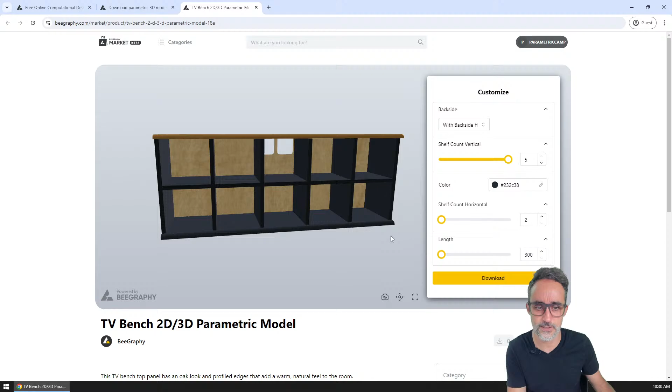As I said, I think Beegraphy has two main modes: editor and market. Market is basically a way of placing models that people have built parametrically in Beegraphy and making them accessible via a simple UI. For example, let's say you have this 3D, 2D bench parametric model. You can allow people to use it and change the model by just giving them the model and the parameters - for example, the amount of vertical partitionings, the amount of horizontal shelves, how long or short it's going to be, the height, the width, do I want 2D or 3D view? Oh wait, it actually breaks down into the fabrication panels. That's pretty neat, this model is pretty nice.

So I cannot stress how awesome this is. I believe ShapeDiver had a similar version where you could upload a grasshopper definition and they would give you a UI wrapping that grasshopper definition, and you would define which sliders and parameters are surfaced. But here with Beegraphy, it looks like it's native. So there's probably a way to just take your model and publish it as something that shows up in the market, which is very, very cool.

This obviously opens the door for people to now create parametric models, and now you have the 2D layout, you have all the parts here, and it looks like I can download this file - export option, for example DXF. Let's say I wanted to laser cut this, so I'm going to download it, it'll show up here, and then open Rhino. What am I doing, oh wrong Rhino. Okay, Rhino - I hadn't opened it in so long I was trying to open Rhino 6. Where did I download that? It's in downloads, this. So I'm going to open the file. Yes, and yes, and yes. And boom! I just downloaded the layout for those shelves with the cutouts.

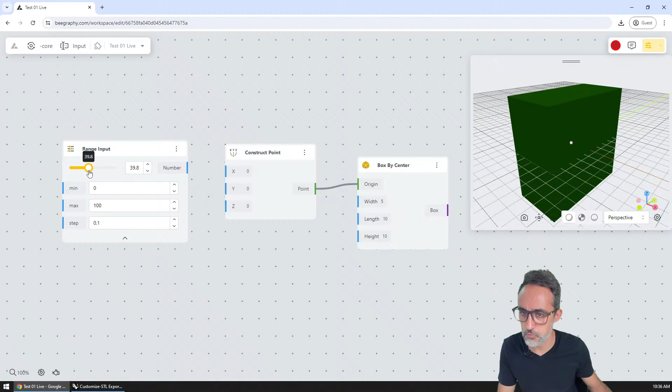And can I copy paste this? Yes, beautiful. So then that and that. I'm gonna say 5, I'm gonna say 5 here. I'm gonna say 0 - let me do 0 actually. Okay.

Beautiful. And then what about - I think this is a little too much. So I'm going to say, what about, yes. So now I'm going to width, oops, yeah, 0 width. Was that an error? Oh, interesting. The value should be - oh, this is very nice, this way of error messaging. That's actually pretty nice. Okay.

So here, the length, and then the height, and I still get the length should be greater, yes. Okay, so here, and then the height should be greater. Beautiful. Okay, we have a parametric box.

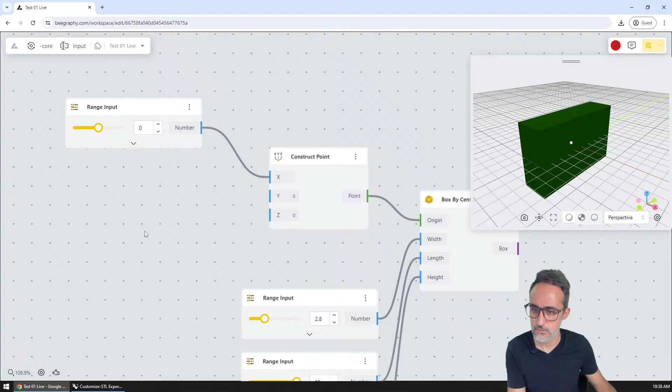Nice. And I can move it to center. I can move it. Let me redo this. So this is going to be from -10 to +10. All right, this feels very intuitive actually. And I copy and paste, and I copy and paste. Okay, and now I move it back and forth, back and forth. Okay, alrighty. Okay, we have a parametric box, folks. Woohoo!

All right, I'm liking it. So, and look at this - if I click on the box here, it centers here. Oh my God, that is genius. Where are you, Learning? I don't know who did that. 100 points for that. I cannot tell you the amount of times I was in Grasshopper and I was like, oh my God, where is that thing that I'm seeing on the screen? Where is that on the definition?

Can I do that with the point? The point is probably inside the box, so I can't really touch it, right? Yeah. That's genius.

Huge thumbs up for that. Yeah, the more, yes, very good.

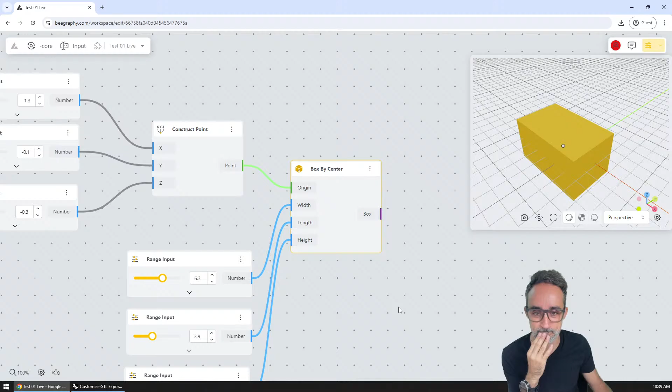Okay, now can I turn off the visualization? Yes, hide shorted list, delete, no. Okay, and this is grayed out, which makes sense. Oh, wait, what is this? Left align, right align, vertical evenly. Ooh, nice, create a group.

Oh, okay, so coordinates of the box center. Nice, this is making my OCD very happy.

Add to group, remove from group, create component. Create component, what is create component? Oh, so it crunches, I see. Can I undo that? Ooh, I cannot undo that. How can I undo that? I guess, can I undo this component? Disable. No.

Okay, so let me get rid of this and start with another range input, and this was -10, 10. Okay, so then let me delete that, and then here and here. Okay, and let me redo this, and I'm going to space evenly, create component. No, I'm going to group, and this is going to be coordinates of center. Okay, beautiful.

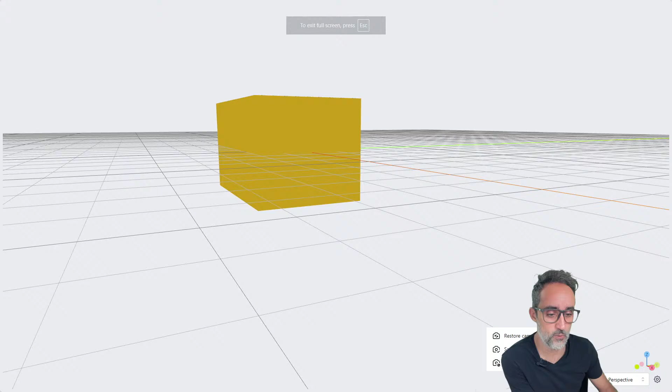I like that. Then some lighting options, which is probably not going to look great since we only have one object, right? Probably perspective, top, front, perspective, restore camera position, yes. Grid, axis, wireframe, transparent, quality, low. Okay, this is very neat.

Is it possible to add points manually in the viewport itself? Ooh, good question. Let me... it doesn't look like it. No, direct modeling is not possible at the moment. Okay, so it has to be purely parametric, folks. But that could be interesting, like a node that basically represents an object that you can directly manipulate. No, that could be an option.

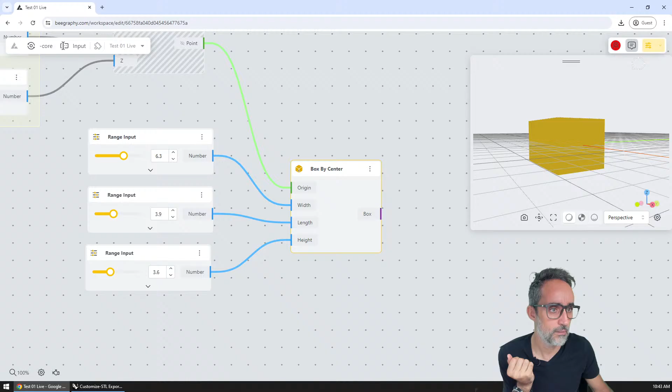Okay, so what else do we have here? This is me, this is some kind of what? Oh, so what is this? What did I do there? A comment, oh. Oh, a comment here. Oh, hey. Oh, where did that go? Oh. Okay, did I miss the comment? Did I kill it? I don't know what I did here. So a comment, where do comments go?

Okay, let me turn off the comment. Oh no, I don't want it. Okay, and then configurator, what is this? Oh, so this is a preview of what this would look like in the marketplace. Ah, interesting. I should definitely put a little more work on the names of the objects. Definitely.

Okay, nice. Oh wait, and you can, oh this is very neat. So you can, if the order in which they're given is weird, you can just turn on and off. This is the input, this is the output. If I had an output, apply sort. Oh okay, this is very neat.

Some UI color options. Okay, back. Oh, sorry, my microphone. Yes. And how do I get out of here? Oh, that's a different thing.

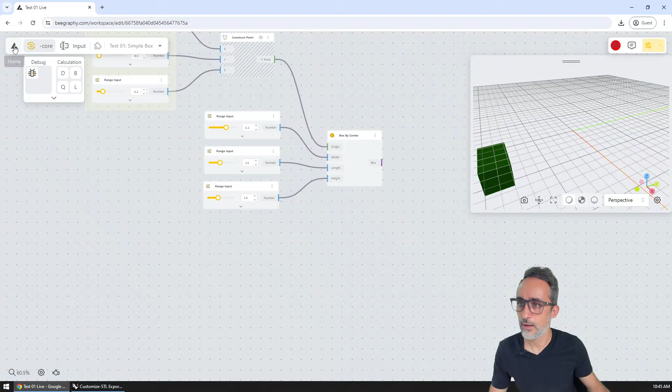Okay, plugins, unpinned. Math. List, material to exporter. Okay, oops, all right. Curve editor, no, you can draw curves manually also.

Okay, all right, beautiful, so new model. So what are we going to do? Test 2, pearl necklace. So remember, we have an example somewhere where we draw a curve and then we subdivide it and we place spheres. So let's try something like that.

Okay, so for example, there was a curve editor, twin curve, NURBS curve. And 0.1, oh what is this? Boolean, degree 2. The points count should be greater than 1. Got 1 point.

All right, so what are the curve editor? Oh, this is what Adita is talking about right now. So let me remove this. Curve editor. Oh, this is very neat.

And so I get it there. Width and height, degree 3. Oh nice, and the curve comes out of here. And these are the coordinates of the points. So I can put that on 0, 0. What is this? To sharp point.

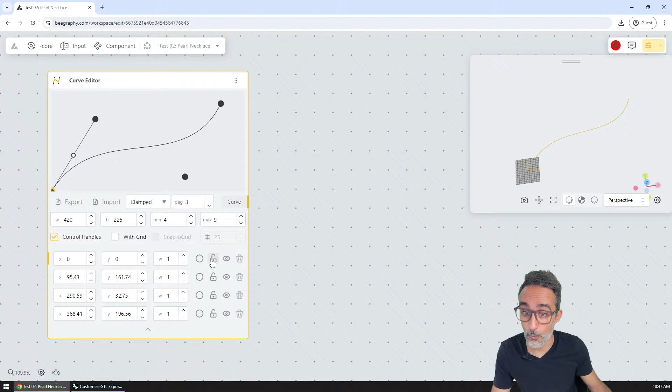Ooh, wow, this is pretty neat. And this point is now locked. And I see it, and I don't see it in the editor. I can remove, how do I add another point? I guess I cannot because it is a degree 3 curve. Is that true? No. Minimum four, maximum.

Can I add more points? And can I have the curve in 3D? Let me try opening the right curve editor. You can open it by double clicking the curve editor. Ah, there you go, beautiful. So this will be here and here.

Maybe a little plus sign here could help from a UI standpoint. Is this the right curve editor? Is that what you're saying? Curve editor, yes, it's the same one.

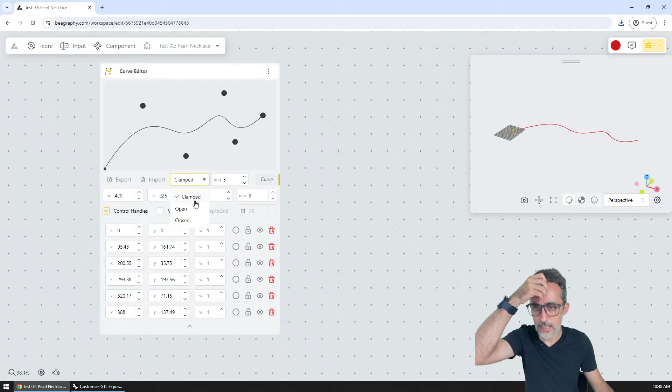Okay, what about Z? Is it always planar? Export, how do I export? Curve control points, ooh nice, and I get all the points, with their coordinates, interesting, I like that. Clamped, open, close, this is very sweet.

All right, so we have this curve, let's say, for example, and let's close it. Yes, so that's going to be the, okay, beautiful. So now let's, with the grid, control handles. You can also add points from inputs.

From inputs? Where? Arthur, are you from the team? Are you from the Beegraphy team? I don't know where to add from inputs. I guess we can import them. But yeah.

Okay, well it would be nice if we had the properties here as well. Okay, so then subdivide. Can we divide by count? Beautiful, okay, divide by count.

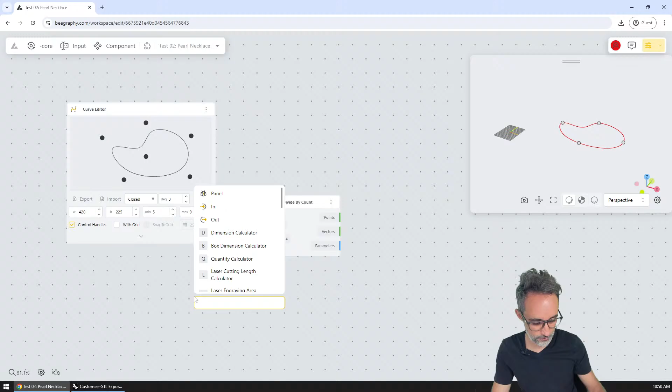And this, I'm going to range input. And I guess the range input, we can customize it to have a step of integer like this. And then this can be, for example, 50. And we connect here, up, up.

Yeah, I guess you cannot divide by 0, but the error message is not very helpful here. Oh, look at this. Oh, and I click on the points and it goes, look, I want to do this again. Oh, where are these points coming from? Let me check. Boom, it's this component. And boom, it's this component. Oh, MVP.

Okay, and then, so now we have points. Is there a panel? Can I, panel, points, length. Oh nice, oh with a little bug. That's sweet. And what is this? Debug? Oh no, and disable. Okay, enable.

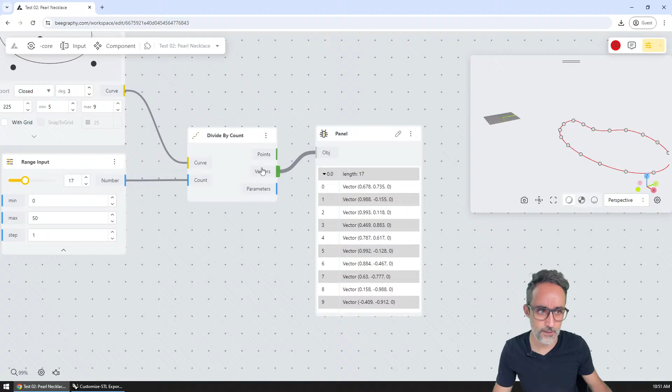So these are the coordinates, so the vectors with their coordinates. What are these vectors? Are they normals? Are they... and then the parameters is going to be the t along the curve, I assume, right? And the vectors, can I see the vectors? Can I visualize the vector?

Vector by 2-point vector, deconstruct vector. Is there a way to... is there a way to see all the components? Is there a way, like a menu where I can just, like this? Is there a way to see all the components available for component, no, for example, how can I pin this?

Ah, okay, list, material, exporter, material, so math, trigonometry, operators, list, sequence set, trees, tools. Oh look at this, that's where the good stuff is. Surface, vector, transform, primitives, curve analysis, toolset, triangulation, Boolean, panels, solid, intersection, text, image analysis, array. Nice.

Beautiful. Hey Richard, it's been a while. How you doing? So,

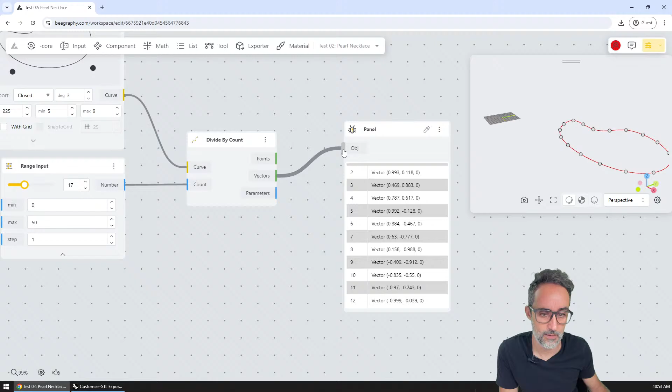Vectors start from origin 0, 0. I'm not sure if I understand that. So, okay, is there a way to visualize vectors? So vector, point list, reverse vector. Is there a way to render vectors?

I'm trying to find a way to visualize vectors as arrows on the... I'm not sure. Vector by 2-point, amplitude, angle vectors, cross product, vector, point oriented, barycentric, cull, duplicate points, point polar, construct point. I guess I don't see.

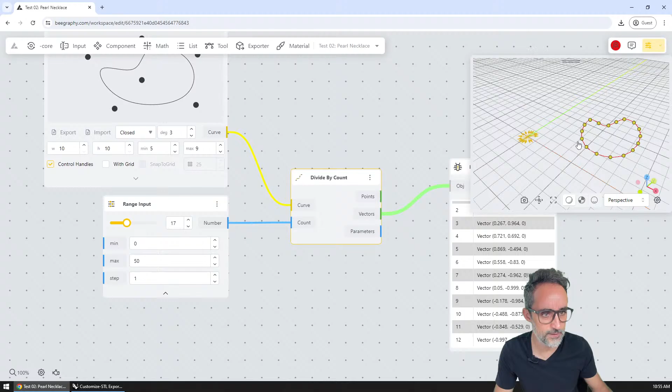Some way to render these and choosing where the center is, that would also be super helpful. Yeah. So that we could see them right here, because yeah, the scale of this is actually really large. So if I do, for example, let's say that we make this a little smaller. Okay, so now everything is much closer to the origin. We have the points, yes, the vectors over here.

That was actually quite nice that I changed the size of this and all the points scaled down.

Add merge node, then connect the outputs of vector to the vector node. Life hack, how about the angle? Let's try this out actually. We could take the coordinates of the points, add the coordinates of the vectors, create a second family of points, and then make a line between those two points, which is also parametric.

So, transform, vector, point, list, add, addition. I'm going to add these points. It doesn't stick because addition is probably just numeric, right?

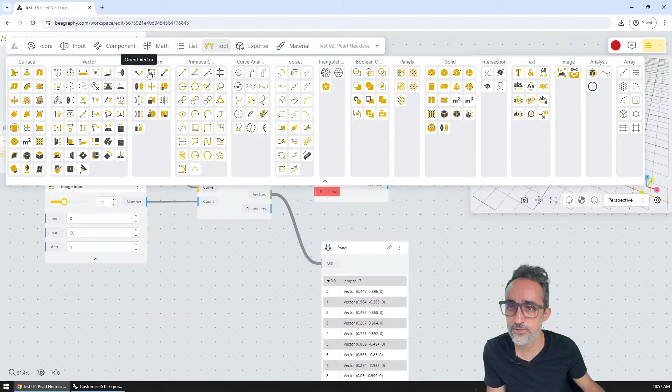Okay, so then let's try to do a vector operation here. Transform, orient vector, move. Geometry and vector, okay. Did that work out?

And now we have geometry that has been moved. And so that's going to be... exactly. And then line by two points, the first point being this one and the second point being the moved points.

And now we have this sort of, okay, I'm going to full screen here. Now we have these lines that are representing the orientation of these vectors. And it looks to me like then what these vectors mean is the tangency of the curve. Very nice. And if I click here, I center on it, oh my God, I really like this. Okay, beautiful.

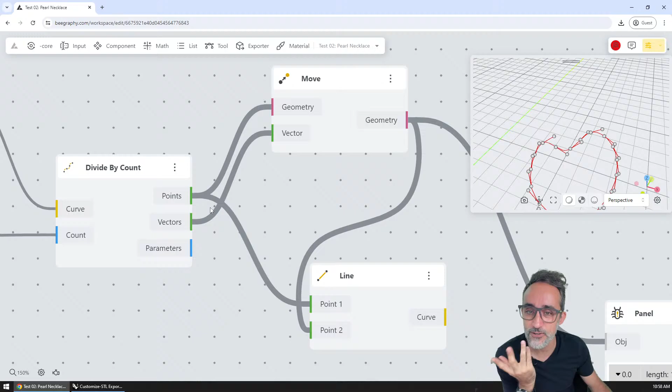Another idea, maybe a little bit of transparency on these wires so that when they overlap, I can tell, because now it's gonna get messy. I'm just gonna throw ideas here at the developers since we're lucky enough to have them with us today. Oh no, not this, okay.

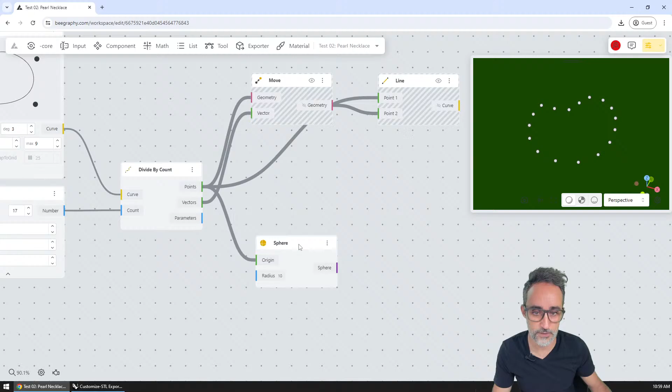Beautiful. Well, shall we finish the pearl necklace? So then we divide it by count. Now we can hide this, we can hide this, I can remove the panel, that's just for visualization, okay? And now a sphere. Sphere, whoop, a sphere in all these points.

And the radius should be... range input, okay? So the radius right now, we're gonna hard code it, and it's going to be 0.4. Okay, and we have, ooh, I like that they're different colors. There's something nice about that.

Cyclorama, oh, I like this rendering mode. Okay, I like this mode. I wonder, can I make this a little larger? Yes, okay. And a little larger this way? Yes, okay, now we're talking.

Beautiful. So now, is there any way to make the rendering quality a little higher? Yes, medium. Okay, so that this is not so...

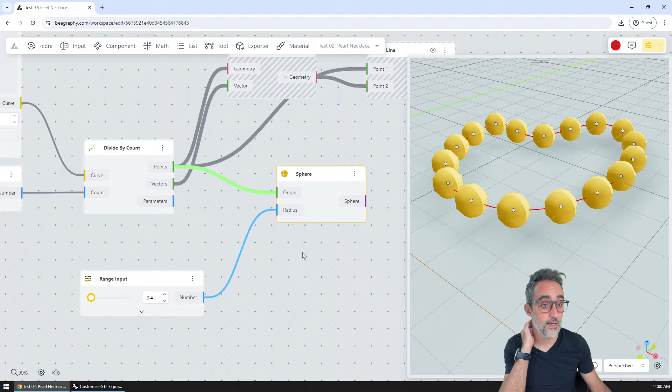You have the sphere, but then the radius of the sphere must be parametric. So we need to find the length of a curve. Is that a thing? Can we do that? Length parameter, the curve, what is the curve? The curve is here. No, I don't think this is what it is. No.

I guess, wait, oh, I guess this is going to be the length before half of the curve and the other length. So I guess if I do 0, then I get the full length and I get 0 here, right? Yeah.

So then if I divide this length by... divide, division. Okay, so if I divide this length by this many items, I'm gonna get 1.1, which should be this radius, which I need to divide by 2. So I'm going to do another division, and this division is going to be the number, and this is going to be the value of 2.

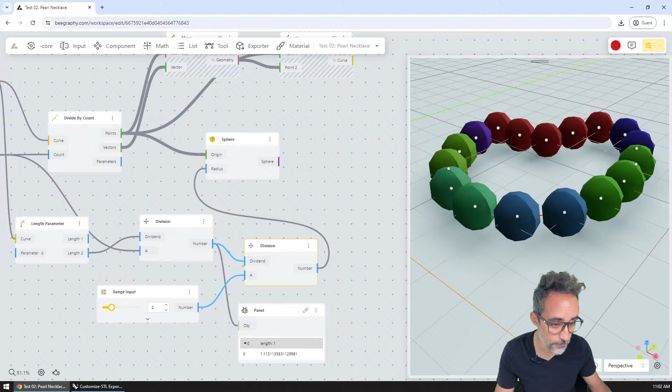And if I plug this in here, boom, yep, where is the top view? Top view. Ooh, I think there's something off about the bounding box zoom. Okay, but yep, we have almost tangent, because we're not really calculating the tangency properly, we're just estimating it, but it's pretty much, yeah. Beautiful.

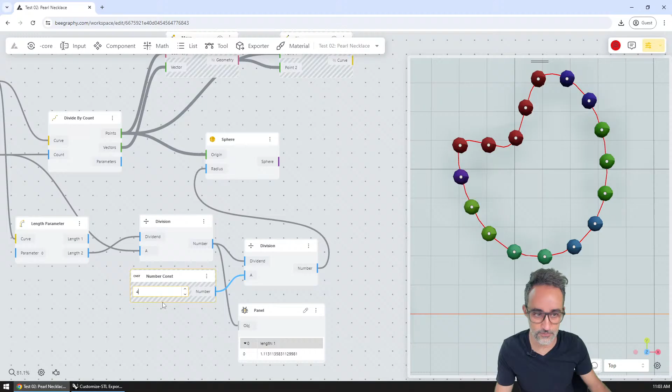Ah okay, so then that's going to be number 2. This is much better. I agree. And of course if I do 4, yes, this is not meant to be changed. Very good.

Because the sizes are small, we think it's in millimeters, the quality is low. Scale it up and it will look better. I see, makes sense. Curve length, there is a curve length parameter component.

Colors are random, they just need to be different unless you use the apply material node and choose the color you want to apply. Okay, let's give that a try. So material, apply material. Ooh okay, apply material, geometry, color, texture, metal.

Wait, let me hide this. Now we have a different set of randoms - opacity, metal, geometry, color, move above, move below. Oh yeah, wait, you can change this, move above. Oh nice, you can move the inputs around. Move above, move below, that's kind of neat.

Number slider is like Dynamo. So cool, it is like Dynamo, you're right. It is, it does - Dynamo is also like a drop down like this.

Interesting, beautiful, okay so we got a pearl necklace. Can I take a break right now to say to the BeeGraphy team, you are right - this is looking so much better already than the last time I used it a year ago. I can really see the effect of the work you've put into all of this.

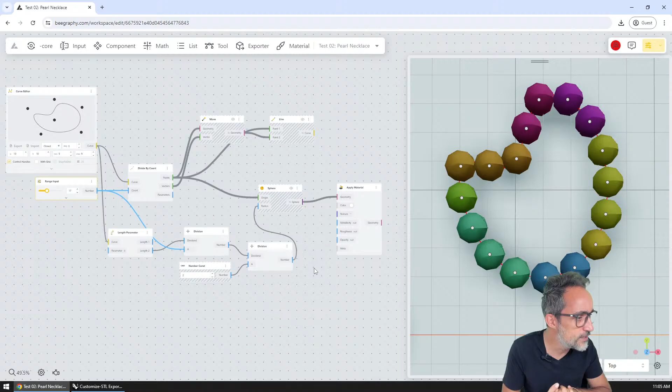You can change the default values of the port, just click on the right part of the port name. Ah I see, ah nice. Now it looks like Grasshopper. Let's choose - I like orange.

Can we do coral? Yes, there you go. Whenever it's not connected, just click on the right part of the port name. Beautiful, so a pearl necklace - we have it, this is fantastic.

All right, oops sorry. All right, more stuff.

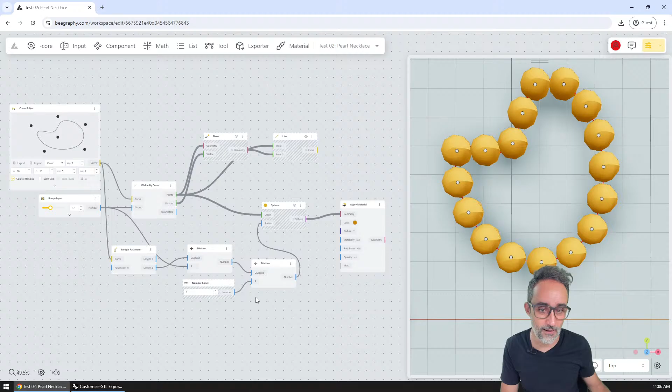Very nice, I also like this layout, I like the larger window. If I were to use this consistently, for a long time - sorry, something is slightly off with the panning. But if I were to use this, an option to click and window zoom would be super neat as well. I use that a lot in other environments, and yeah, because I can't really zoom in anymore right now. But an option - I like the layout of a larger window here.

Sorry, I'm covering this right now, but you see how you can extend and retract? If I were to use this for a longer period of time, I think this would be my preferred layout. Or maybe if I'm missing Grasshopper, maybe I would do the opposite - I would just go here. Can I do that? Yeah, I would just dock it there and have it here. I think maybe I'd do that because I feel I'm so used to the left window.

Yeah, but wait, you know what - I'm gonna take this back because I don't want to bring old Grasshopper habits to new tools. I want to be open to new experiences, so never mind, I'm taking that back. I want to be open to new experiences, so let's just try how things feel like this. Okay, all right, so...

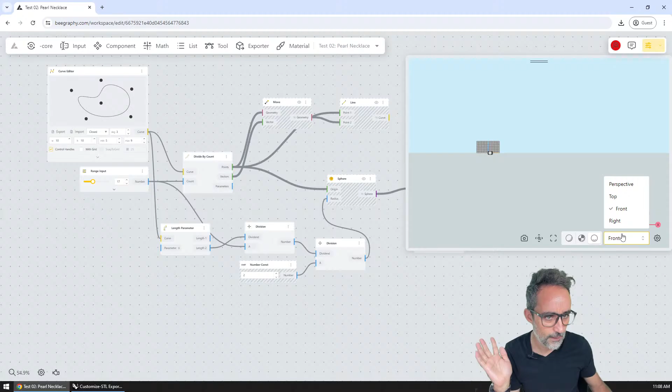Can I export a screenshot? We said we could, right? I'm having a little bit of difficulty with the zooming right now. Okay, and where are the points? I'm going to hide these points. All right, and can I export a screenshot?

Is there a way to take a screenshot of this? And then click zoom to fit to make a close-up.

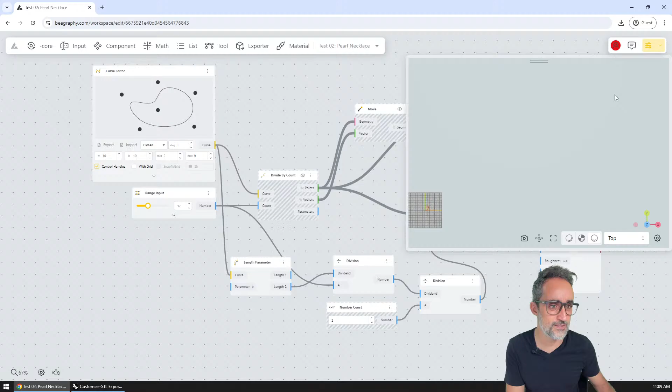Ooh, I'm not getting that. You can select an object and click zoom to fit to make a close-up view. I think the problem is that since I scaled this down, the points were much larger before, and in memory they're still stuck at that size, so zoom to fit isn't working properly. If I click on these spheres and do zoom to fit, no, it still goes off.

Okay, well, just minor polishing there. What is core? Debug, calculations, inputs, constant math... oh, math expression.

Ooh, how does this work? I like this. Can we replace this with an expression? So, length, and can I rename this? Add port - oh, add port is here. Add port, remove port, value. Can I rename this? I guess not yet. So that would be, and then if I plug this in here, and I plug this number in here, what I want to do is...

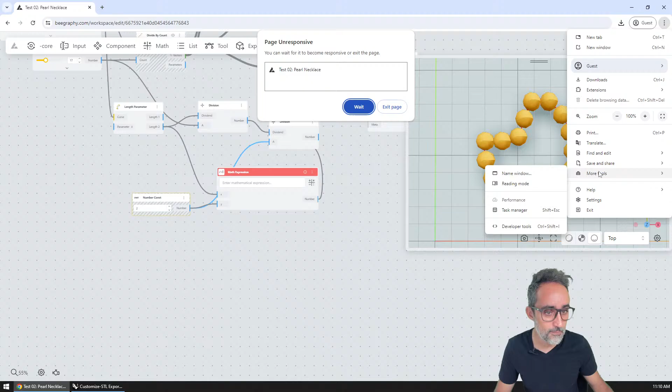Oh, I froze something. It's frozen right now. Something broke. Can I? Yeah, something went haywire. Console, and there's no dump here. Let me give it a chance. Let's wait.

Yeah, but it's pretty frozen. There was something about plugging this here that didn't work. All right, so reload. Oh, it's gone. Okay, all right, so let me fire up another Chrome.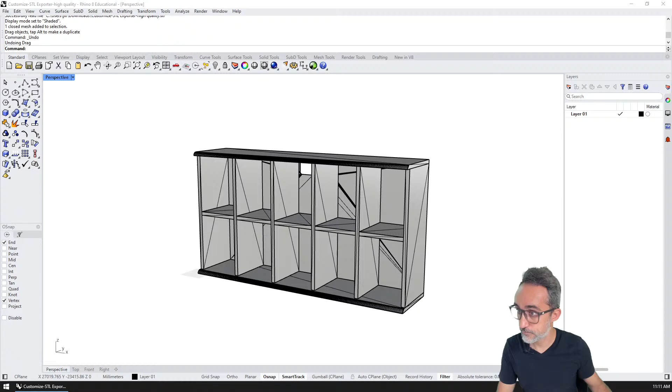Beegraphy.com, I'm gonna log in. I'm gonna do this privately if you don't mind. All right, and yes, editor. So if I do pearl necklace...

Oh, but now it's stuck. Okay. Yeah, it's also already - so I guess this got saved, and whatever is causing this unresponsiveness is... yeah.

In safe mode, remove the info that is breaking. Okay, how do I open in safe mode? Very interesting. Is there a way to open in... oh, very nice, safe mode.

To perform calculations, activate the solver by clicking the engine button. Okay, so this was bad. So actually, let me fix that. And can I disconnect? How do I disconnect an input? Can someone help me here?

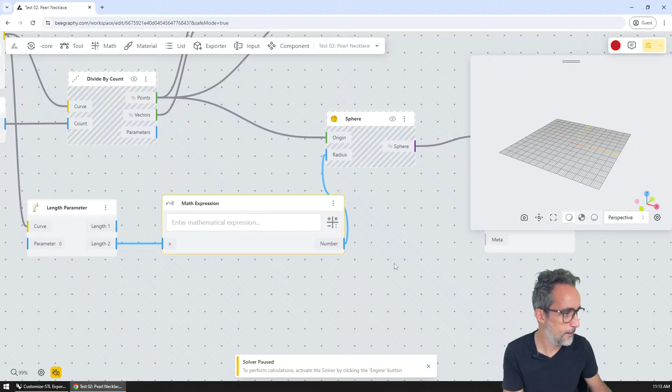Actually, I don't even need this because this should be a number 2 that I can hard code in the expression. Hold Control and click the port. Okay, beautiful. Okay.

Nice, so then I'm going to click on the engine right here on the corner, resume solver. Boom, this got an error. Yes, okay, now we have it all, all right. And now the zoom extend is actually working better now.

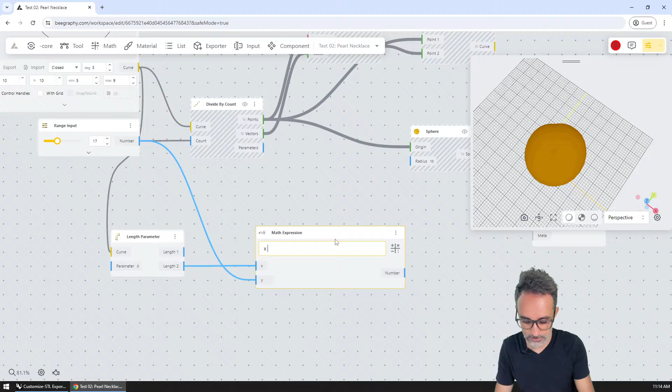Beautiful, so now here the expression should be - I know I need the amount of... add port, I need the amount of connections. Okay, and then this is going to be, so what do I just type? x divided by 2 times y. Is that what I do?

And then I plug this in here. Beautiful. Nice, and I'm gonna go for... no, I do like the cyclorama one. Yeah, that I like better. Look at those shadows, nice.

So we have a math... can I send you some thumbs up here? I recently tried to write code for an equation parser, basically taking a string and turning it into an actual mathematical expression at the code level, and I was awed by how difficult it was actually. It wasn't as simple as I thought it was going to be. So good job with that, Beegraphy team.

Where are you? Does twin curve also work? Factor is not working as the type is number. Yes, twin would work, all right. I'm not sure what that is about, but okay. So we have the pearl necklace.

Okay, I'm liking this. I'm gonna go back to the main dashboard because Lernick mentioned this idea of safe mode, but there's a bunch of other things that are actually good. So, editor, safe mode - and do we get screenshots here or thumbs? Do we have to make that on purpose? Okay, so viewer - if I click on viewer, now I get the...

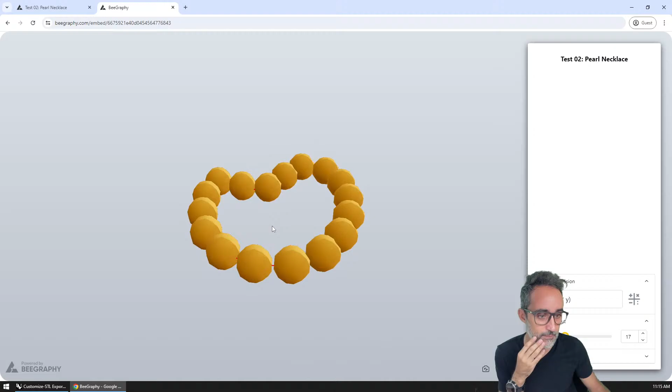Pearl necklace, and I guess there was something here to configure the configurator. Exactly, so in the configurator, this is not going to be public. Nope. The curve editor - the curve editor could be public.

So, for example, let's say math expression - no. Range input is going to be number of pearls, and curve editor is control point. Beautiful, okay.

And then we go back. So now we can resort things. Control points is going to be up, this is going to be applied sorting, number of pearls, control points. So this is what people will see the moment they load it.

Okay, so if I do control points, this adapts. Beautiful, nice. And this is very nice, and I can take a screenshot. No, oh no, restore camera position.

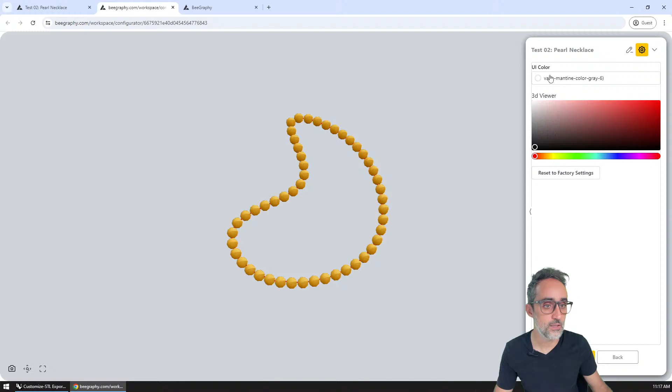Okay, so this was the configurator. UI color, 3D viewer, okay. Now the output list, okay, this is important.

So let's say that if I were to use the configurator, if I was to put this in the market, and I wanted people to download the pearls and perhaps also the polyline, how do I define that those are the things that should go into the download? Is there any way to say output? Okay, so what is this? This is created to add outports inside the component.

Maybe this is for components that are wrapped, is that what it is? Parametric Camp, there's two of me. Okay, now you need to use export nodes.

Okay, export nodes, this is so helpful to have the developers actually here. Okay, STL exporter, I see. So then I can just plug in here the geometry, and because it's STL, I probably cannot export the curve, right?

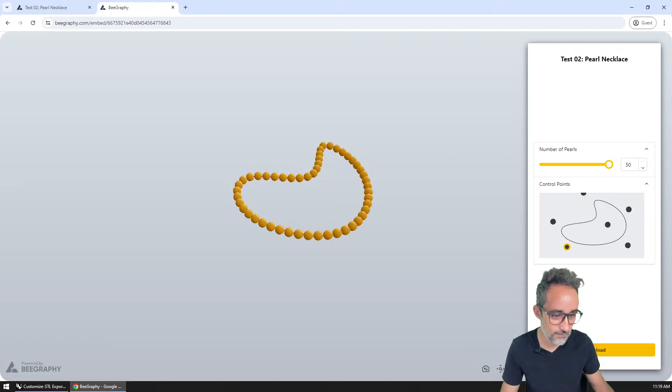So, alright, so how does that work? Alright, so viewer, I have the viewer, pearl necklace, the number of pearls, the control points. And if I download this thing, export option, STL exporter, polygon density, high polygon density, done.

Oh, it's happening, I'm going to open the file. Nope, and nice folks, here are all the spheres. Exactly, very nice. It looks like there's a little bit of awkwardness here in the sphere.

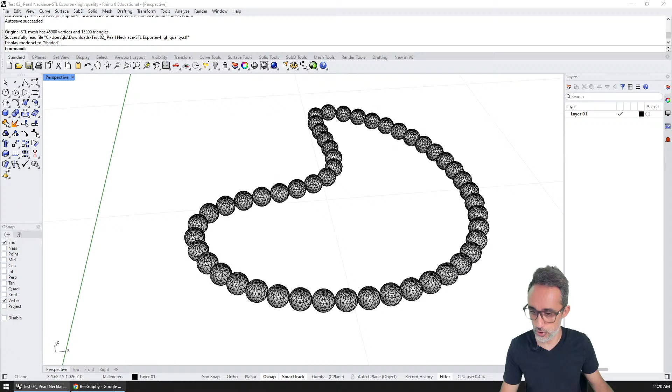I don't know what that is about, or maybe it's some export issue. I don't know, but because it's an STL, we did not export the polylines, because the STL format does not accept anything that is not triangles. So if we wanted to export both things, I guess we would need to figure out a different file format. Maybe we use the OBJ exporter, maybe the DXF exporter, we would have to figure out.

Let me just try DXF, because DXF, depending on the configuration, does not allow triangles, but sometimes it does. So let's reload here. So now I'm going to download, export option, DXF.

And it's crunching, it's calculating. And maybe it's not succeeding because of the problem, because we added triangles. Yeah, and it's a little blocked right now. More tools, developer options, and yeah, there's some kind of error. I broke something, this is what I do folks, I break things.

Yeah, okay, yeah, I probably, because I fed data into the DXF exporter that maybe cannot be exported as DXF, disconnect the mesh from the DXF exporter. That's probably the reason, yes.

So if I export the curve now, okay, so let me reload and download, and DXF exporter, yeah, and it exports right away. And then open, yep, and then we get the polyline.

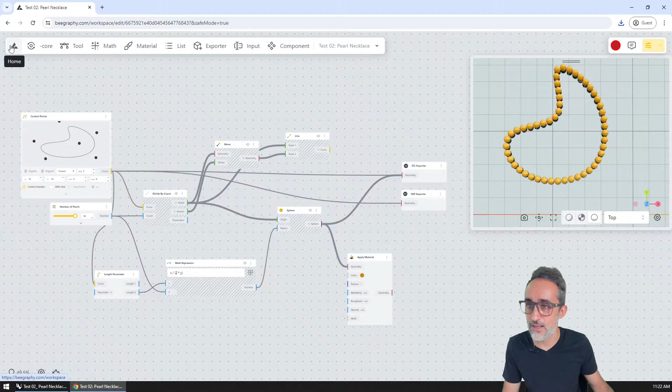Yeah, is there any way to customize the background? So some way of right-clicking and setting the options, the color of the grid, if there's a grid or not, that would be nice. I don't know, maybe there's somewhere there.

Like, what is export, export option. Oh yeah, so you can download right now. Ah I see, yeah, so if you want to bake something from here, you can't really bake. What you do is you figure out the export method, and then you just export it here. You bake with whatever you've done.

So, and can we rename this? This STL exporter, it would be nice, I don't know if we can do this. It would be nice to be able to rename this so that instead of DXF exporter, I can say export the thread, the braid, and here exporter for the pearls, right? Because I have to split them, you know, so that would be nice.

Just change the computer or the browser to dark mode. To rename, double click on the name of the node. Oh, okay.

Exporter, braid exporter. Beautiful. So now if I go to the viewer and try to download... nice, this is very nice. Yes, because now I know what I can export, which is probably how the person in the previous example, the one that said 2D or 3D, was exporting. Beautiful.

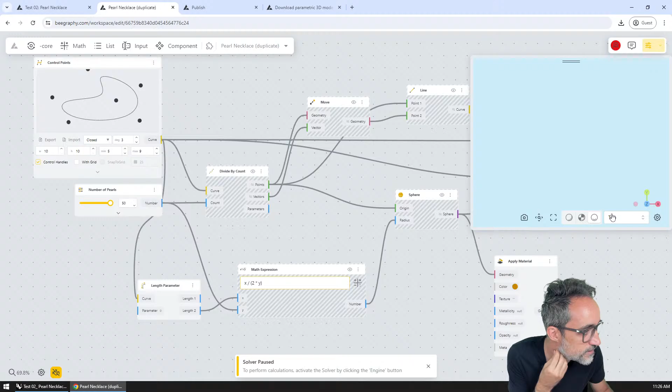Solver Paused. Okay, beautiful. And then perspective. Okay, so let's save this camera view here. Save camera position. Beautiful. Okay, so now I'm going to rename this 'no duplicates pearl necklace'. All right. And I'm going to go back to the Beegraphy.

Oh! Oh no, what happened? Did I kill it? Oh no! What happened? Oh no! Come back. I guess I lost it with the deleting and the... Ah, damn it. Okay, well...

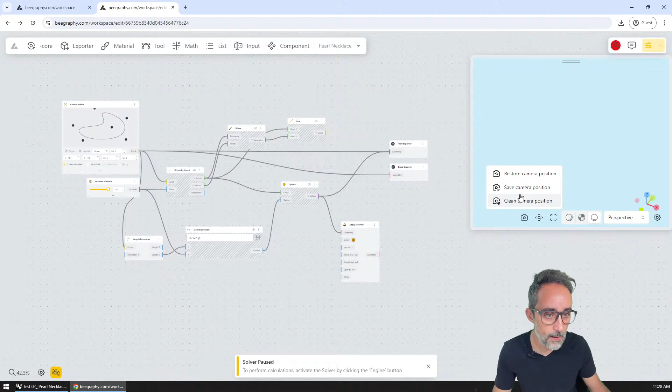Yeah, I may have messed something up. Restore camera position. Is this computed server side or client side? Ooh, I have no idea. Maybe the folks can help us here. Can I force save this somehow? Yeah, it looks like it got... I deleted it from my account somehow, and then it got lost.

Okay, anyway, all right, so I think this is the time, folks. Should we finally, now that I think I got a good grasp of the tool, try to make the Berlin Holocaust Memorial model? And for those who may not be familiar, it's this—where is a good photo? This, yes, it's basically this memorial in Berlin. This thing, yes, which we've done a lot in the channel, on other different platforms.

Maybe it's published in the published model tab of the workspace. No, I think I deleted it. My assets? What is this? Ah, this is the component that I created. Yeah, but the thing is, the model is still somewhere, it's just maybe not linked to my account.

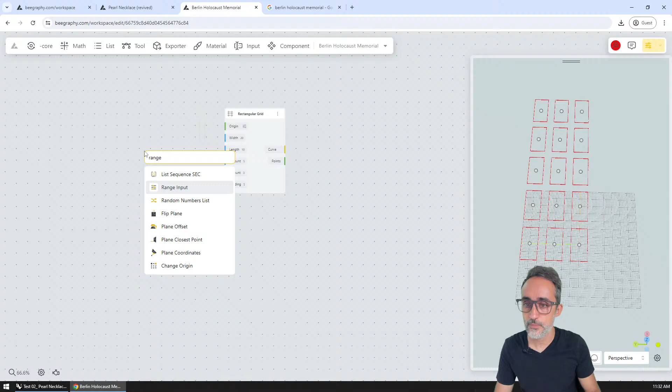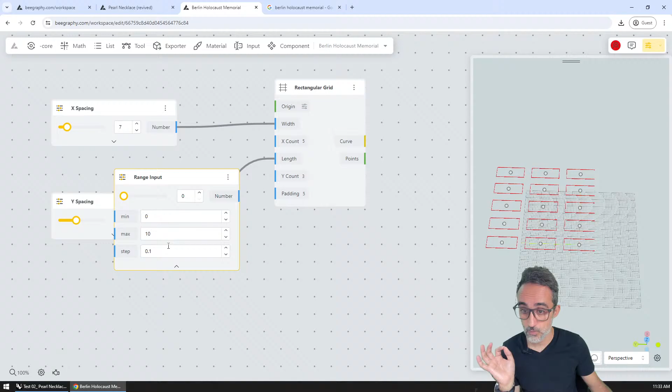Oh, that was very neat. Range input, and this one is going to be an integer. So I'm going to do, for example, here's going to be X count. All right, beautiful. And I'm going to copy and paste this, and this is going to be Y count.

And the padding, I guess the padding is for this curve that is showing up there, which we could use because it really fits what we're trying to do. But then we don't have a lot of control because I'm going to assume that this is a uniform padding.

So X spacing is going to... no, let me do 10 and 10, and then 10 and 5. Okay, and actually wait, so spacing in X. Oh yeah, because then the padding also. Oh I see, yeah no. So padding is going to be a constant because we want to.

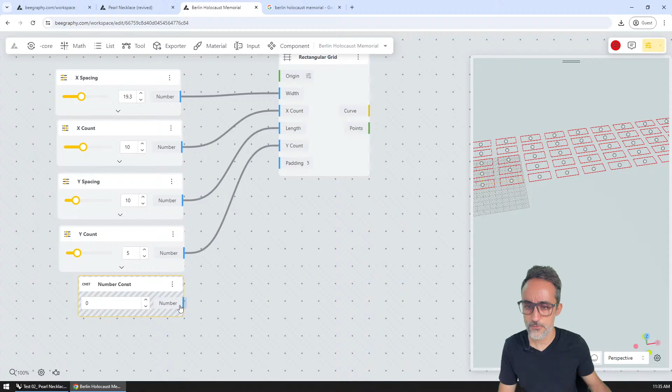What was the... yeah, 0 is going to be a constant because we want, and then this I'm going to hide. I just want the points. Correct, and I don't want the grid. Yeah, I just want the axis. Okay, so now I got my grid of points. Beautiful.

Alt mouse drag. Oh, what did I do there? Oh my god. Oh boy. Something did not go very well there. Let me try again. Alt... oh yeah, it's not working for me. It's creating a lot of copies for some reason on my system.

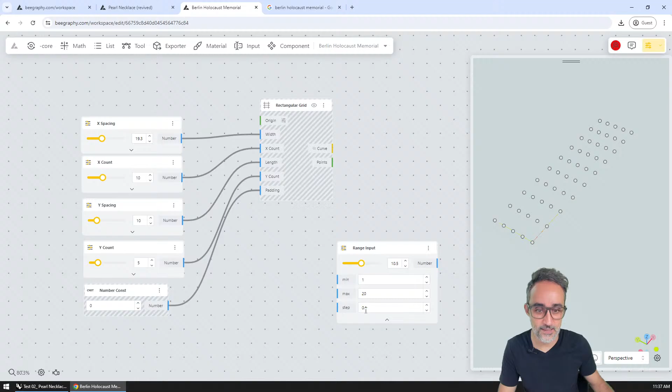But that's actually a very cool shortcut. And then what if I do 1, 10, 20? From 1 to 20? Ah nice, very nice. And what if I do 1, 10.5, and then 20? And then it gives me the step. Ah, that is very smart. Beautiful, you can just write numbers in and it offers you a constant range.

Looks like there is an issue on Windows computers. Ah, you guys been trying this on Macs? Yeah, a lot of the parametric world is Windows based.

Whoop, okay, beautiful. Can I group this? Oh, the shortcut works, Control G. Nice, I appreciate that. Okay, so now we got this, and then we're gonna do some rectangles.

Rectangle, 2 points. Rectangle, 3 points. Is there a rectangle from center? Let me check. Primitives, rectangle, origin, width and length. Okay, let me try this. So I guess this is from the corner, right? Yes, it is from the corner, which is fine.

In our case, it doesn't really need to be the center. So let's do box width, and then let's do box height. Or maybe box X so that it's a bit more consistent with the rest. Okay, all right, so I'm gonna do a few more in this direction. Yes, and then I'm going to shorten this a little.

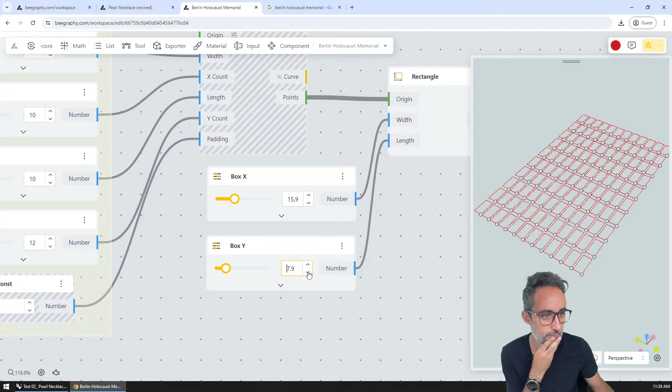Okay, and we may not even need rectangles. We may not even need to see the points. Okay, so now we have the boxes. Okay, can we extrude? Yes, extrude along, extrude curve. Okay, and then the curve. There you go, beautiful, so now we have the boxes.

Can we cap the entities? Yes. Wow, that was nice.

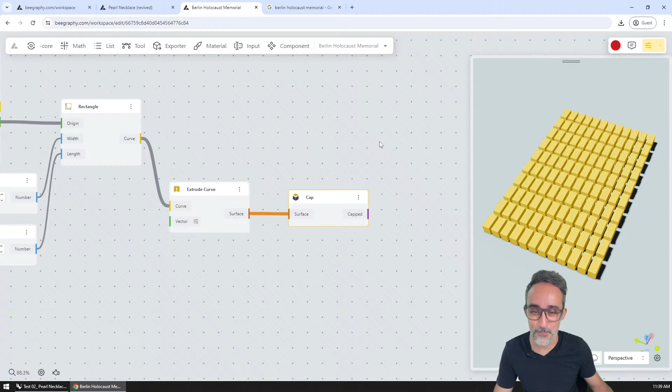Okay, so we're getting there. Okay folks, Beegraphy people, I tried to do this a year and a half ago. It was close to impossible. So again, good job on all this development. Okay, it felt very nice and natural.

Do I like the random colors? I mean, why not? Yeah, I mean, because you can always choose a different color with the, what was it? Here, the texture. And here, I'm gonna go for pink, bright pink. Yes.

Okay, let me check the chat. Rectangle by center is also there. Oh, I couldn't find it, but it doesn't really matter for us.

I would like to join the chat and have a lot of conversation, but I'm unfortunately unable to participate in the conversation because I am driving. Look forward to a great lecture today.

Well, that was quite a long post if you're driving, math designer. So please just listen to us, wait until you get somewhere, and then you can get back on the chat. Thank you for your interest.

Is there any isotrim-like components? This is so cool, Abhishek. Abhishek, hey, it's been a while, good to see you. Is there any isotrim? I don't know, isotrim, surface isocurves.

Okay, here's the thing. We have to come up with a way to give these blocks some kind of variable height that also resembles an undulating surface. In previous examples we've done it by literally modeling a surface and taking it as an input. Here, because in Beegraphy we can't quite import geometry, we have to generate everything parametrically. We can just come up with some rule to generate this kind of varying heights.

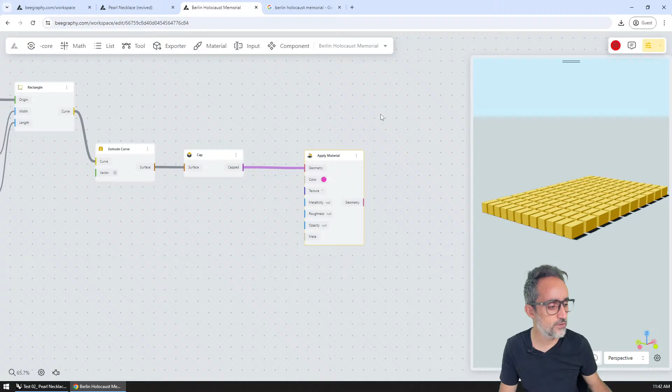So, is there any shortcut for hiding and visualizing, folks? Is there any shortcut for hide and unhide, like Control Q? I don't know what I did there. Nice to meet you, I am also a Grasshopper user in Korea. You can also write your own feature, which is cool.

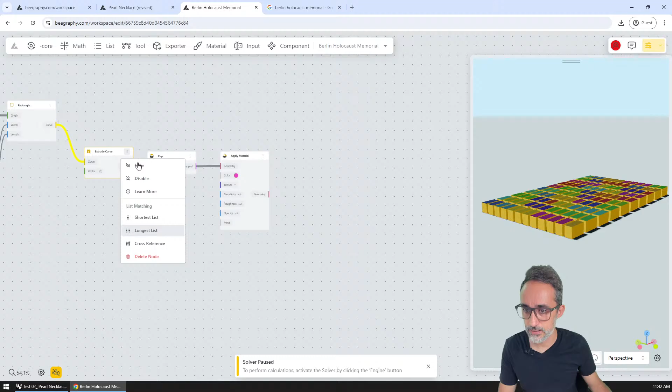It looks like this is getting a little laggy on my end, so I'm going to turn off the solver. I think we might be rendering a lot of geometry, so that's why it's a little laggy. I'm going to hide this, and this, and this. It's much more lean now, so it looks like the amount of geometry was causing the lag.

Okay, we have isotrims now working. It's called surface isocurves. All right, so here in vector we now have a hard-coded input of 10 units in Z. We need to come up with a better rule for this, so what I'm going to do is create some kind of sine and cosine wave with the expression editor.

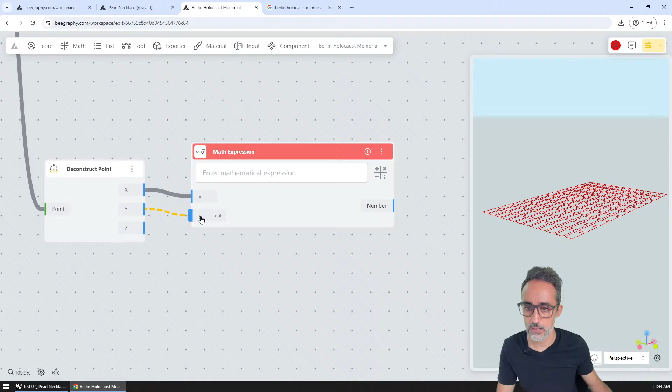So, expression, math expression. In this case I'm going to take the curves, take the origins, and deconstruct them. Deconstruct points - I'm going to take all these points and deconstruct them. This is going to be more of a... actually let me turn this on again, and then I'll take the x and the y - I can't rename the port, it's okay. So x and y, and I'm going to come up with some mathematical expression. Oh nice, there's a drop down with the expressions, this is pretty neat.

So I'm going to say, for example, let's do the sine of x times the cosine of y. And this is going to give us... not random, but very small numbers.

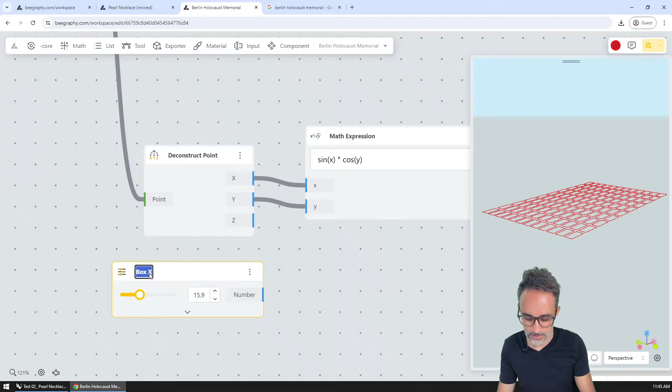So I'm going to add some kind of base height. For example, what is the box X? I'm going to call this base box base height. And also, refreshing the tab may help clean up the cache geometries and may improve performance - good to know, we'll try that later. So base height, I'm going to add another input, another port. This is going to be now Z plus blah blah blah.

And this is not going to work great, but now what we can do is construct another point with the same X, the same Y, and this Z that we've just recalculated. And you can see that it's not quite powerful, so let me add another input.

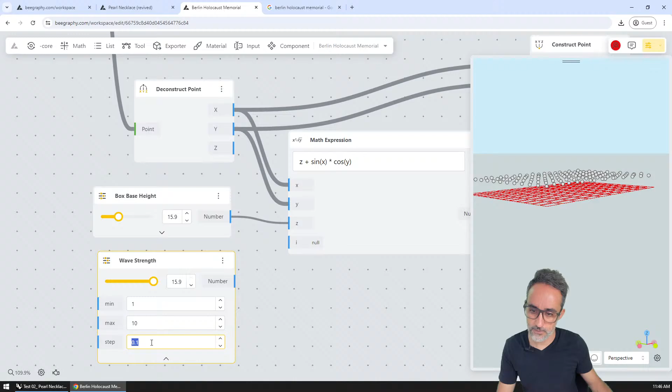I'll move this below, and we're going to call this, for example, wave strength. This is going to be smaller, going from 1 to 10 in increments of 0.1, that's fine. So I'm going to plug this in here - this is going to be 5, for example - and we're going to multiply each one of these. Exactly, so now you can see how the moment I increase this factor, it's much wavier. And actually there should be a 0 here so that we can...

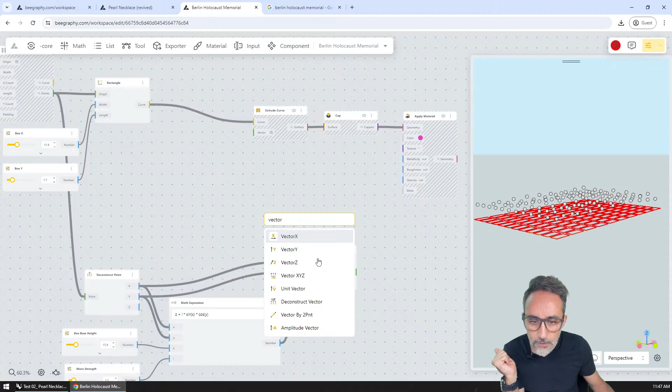You see the points? Okay, let's try connecting everything. So now we're going to do a vector from 2 points. The first point is going to be the points at the base, and the second vector is going to be the points that we just created.

And what is this Boolean? Boolean, unitize output. No, we don't want to unitize the output. Okay, all right, are we ready for this? I'm going to hide these guys.

You can use random numbers list. Yeah, but I don't quite want random. But actually, let's just try. Actually, we will try later. Why not? Deconstruct, math expression, wave strength.

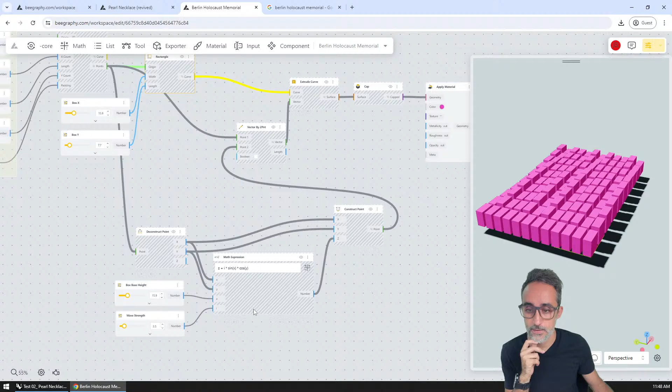And then the vector is here. Okay, and I'm going to turn this on. Ooh, there you go. And I'm gonna hide this, I'm going to hide all of this, and hide the rectangles too, because we don't need them. And then I'm going to increase the wave strength, and you see this updating here.

And it's not very smooth, but that's because we're not controlling factors. So let me stop this for a second. Wave strength - I'm going to call this wave strength Z. Okay, then I'm going to add here, add port.

Add another port. I'm going to move this up, and then I'm going to control wave strength in the X direction. I'm going to do wave strength in the Y direction. And then I'm going to divide this by - so in the X is J, and in the Y is going to be K. Okay.

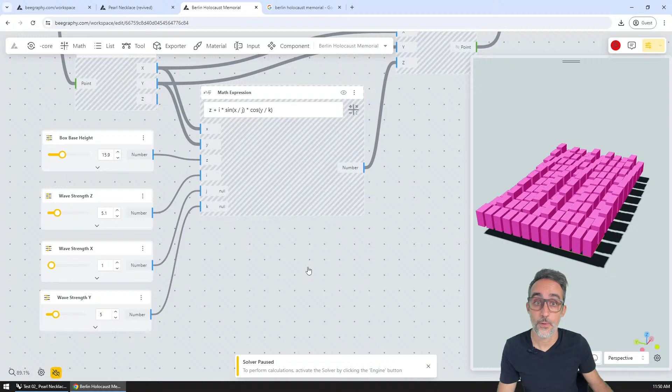All right, so then let's do number 5 here, and then let's do number 1. I like the wave in the first direction, but I think in the x direction we need to work on it. Okay, so recalculate - and something is recalculating. Yes, exactly.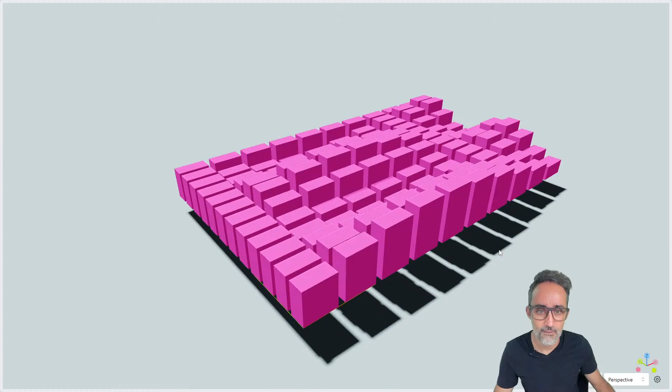All right, 5. What if I do 10? Now we're talking. And I'm going to increase this by a factor of 10. Nice. And you can see that we do have something. Yeah, yep, yep, yep.

Beautiful. So then now what we would do is we would set - so this is just for visualization. So I'm going to hide this. Yes, so now it's much leaner.

And now here, we will basically export - export STL exporter, geometry. And if I now want to export this, I choose STL exporter, high resolution, I download this, and now I can just drop it here, and boom, ready for 3D printing. Very nice.

Fantastic, that was awesome. So Arthur recommended that we try random numbers. So I'm just going to do that. I'm going to use random numbers list. Okay, so what is this?

Random numbers is - so base box height, so this would be the start. This would be - actually not exactly. So let's say, yes, so this would be...

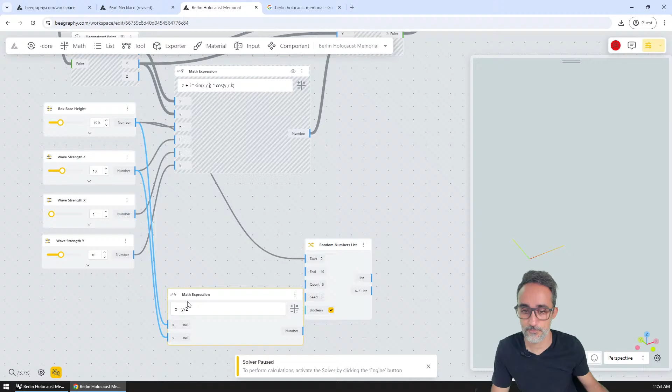So that's going to be the start. The end is going to be the same, but with a plus, so that's going to be the end. The count is going to be the number of points - so this is going to be the random part, and the number of points, I guess there was a list here. So list, number of elements, list item, list length.

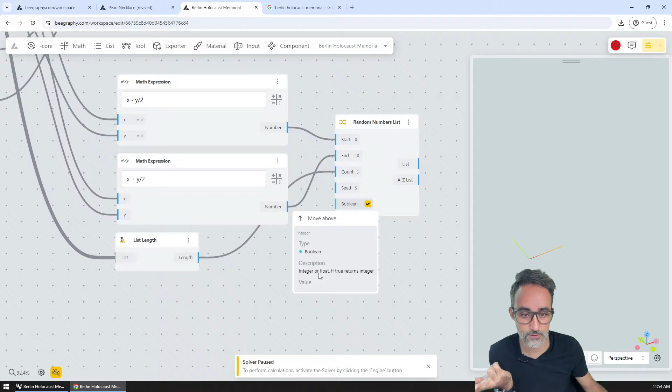Okay, so number of points, and I'm assuming we are getting here the amount of points, correct? Which we are not, because right now we have the engine disabled and the seed is whatever, and Boolean - integer or float? If true, returns integer. No, I want floats. So I'm going to redo this solver.

You can use random numbers list. Okay, so we got the solver on. And panel - what is the list? We have 120 heights. Okay, beautiful. So then, is there a dispatch? Nice.

No, actually the other way around. We need a weave. No, not a weave. So, okay, so what was this? Tree, weave, condition, conditions.

What is this? Okay, Boolean to number. Is there a Boolean button? Is that a Boolean? Is there a Boolean input? I see, so here, if I connect this, what is conditions? String, index of condition string. Ah, I see what you mean.

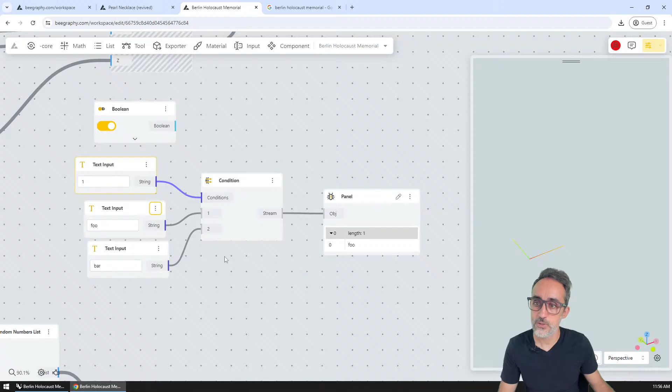Which is kind of what I want. But then it would be nicer if this, instead of a string, was a Boolean. So is there a way to convert a Boolean to a number 1 or a number 2? Is there an easy way of doing that? Can I do it with an expression? Are there conditionals here?

No, okay. So let me then take a look again at what can we do here. Clean tree, trim tree, flatten, graft, weave, condition, set, list merge, shift list unions, list order, Fibonacci, duplicate, remove pattern, replace items, partition list.

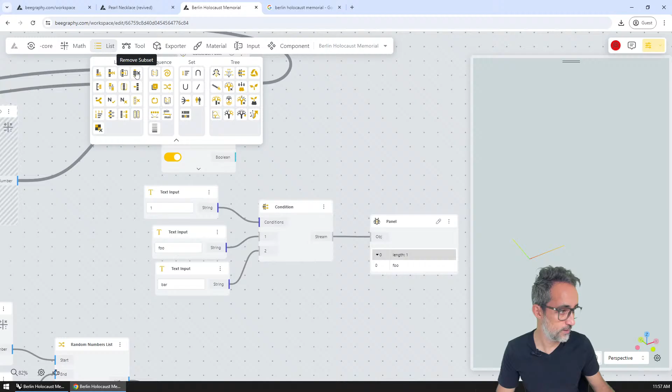In 1, connect circle, in 2, rectangle, and then you choose one of that to show. I'm not sure, instead of having to write here a text input, I'm trying to just, because can I rename this?

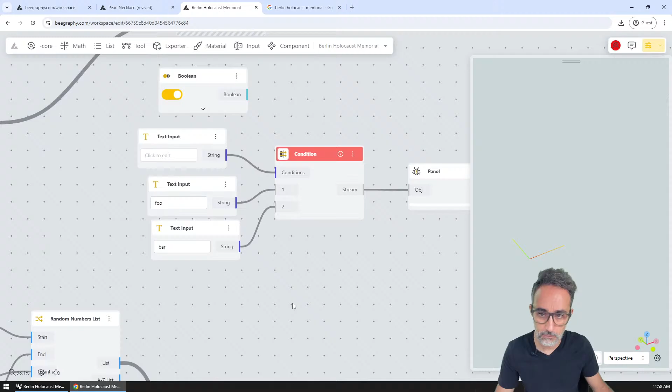Because it has to be the number 1 or the number 2, but I can't quite rename this. No? Oh, I'm not understanding that. I'm sorry, so let me find a different way. So I want the opposite of this dispatch, actually.

Or maybe I don't, maybe I can just get away with this dispatch. No, I can't, actually. Well, I could, it's not very clean. And if remove pattern, sequence, duplicate, remove end - you can use Boolean converter.

What is that? Boolean converter. Conditions. Description, any. Yeah, but then I can't plug the Boolean here, which is what I want. I need the opposite. I need to go from Boolean to conditions.

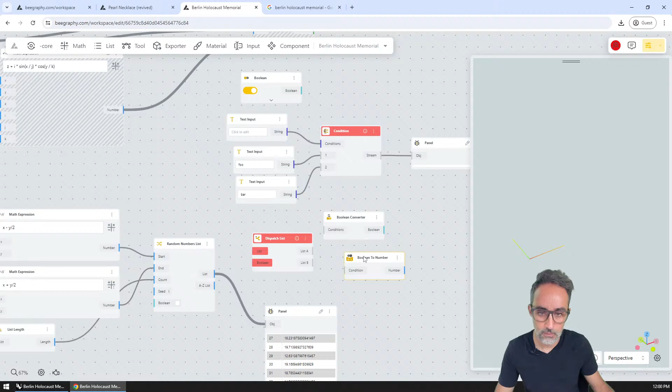Can I do that? String converter. String to number. No, Boolean. I need Boolean to something. Boolean to number. But I can't plug in a number here either.

Has to be a string. Index of condition string. Text input, rich text editor. Where are those converters? Here, are they here? No - exporter, tool, list, math. The number to string. Number to string, number to string. Okay, so let's see.

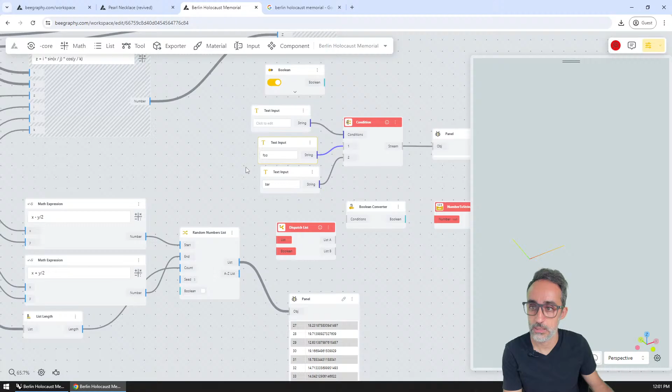If I plug, can I plug a Boolean there? Ah, okay. So, all right. I think I'm just going to try a completely different way. Is there Boolean to number? Oh, okay, so this is going to be it. Okay. Boolean converter, no.

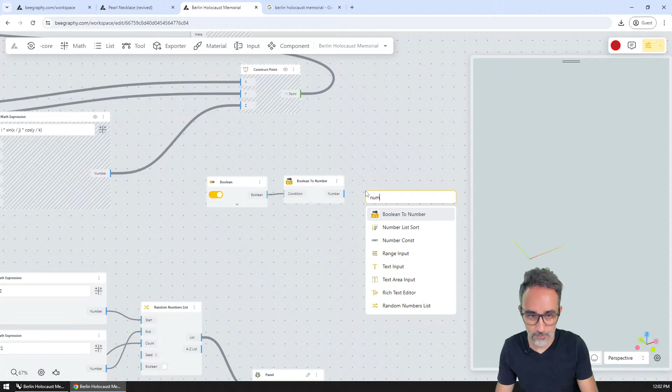Where was the Boolean input? Here - Boolean to number and number to string. Number to string, okay, there you go, now we have it. Oh no, but that doesn't work. We need to add, because

condition, because it's number 1 and 2, we need to add the number 1. Okay, that was a little convoluted. Okay, so now constant, it was here somewhere - constant, exactly. So this is going to be the number 1. We go in here, so now we have number 2 and number 1.

Okay, there you go. And the string for number 1 is going to be this expression. And otherwise, this is going to be, and we're going to call this random wave, random heights. Okay, and then we're going to plug this, we're going to plug this in here.

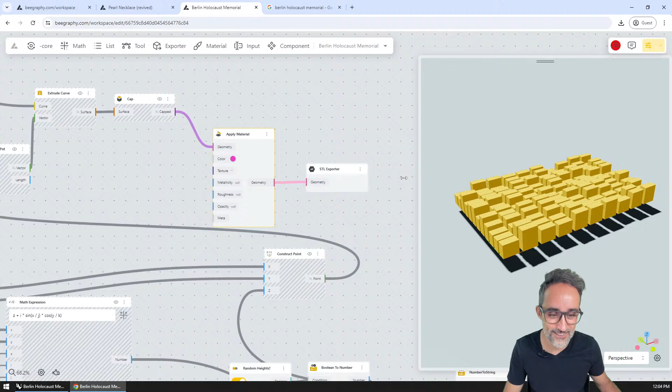And we're going to turn this on. There you go, finally. Okay, I'm going to make this a little larger. So now we have either random heights, or if I turn this off, then we go back to sine mode. Is that correct? Very good. There you go.

Very nice, I'm gonna do gray, right? Because, I mean, the concrete. There you go, beautiful. Okay, so I think we got this. I think this is actually going to be a pretty neat example for the video that we're going to make next week. Okay, beautiful.

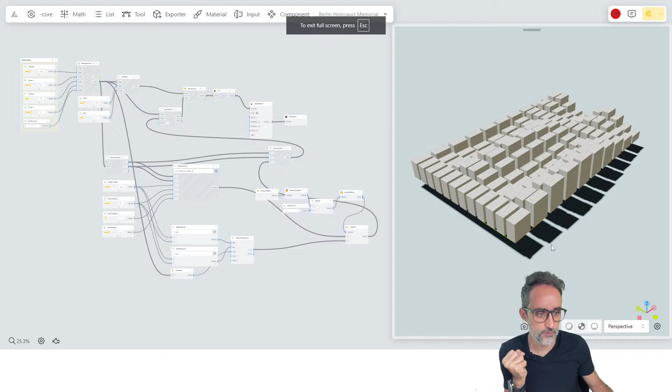Where do I stand? Is there anything else? I'm going to save the view, save camera position. I'm going to go full screen. Very nice. And we got this. Yeah, I could do a little bit more work, updating, grouping things, giving them better names, etc. But I think this is a pretty good place to start.

So, summary. In this live stream, we've taken an initial exploratory look at the Beegraphy online parametric modeling editor. We've done 3 exercises or tests: a simple box centered on an object, then we did the pearl necklace, and we did the Berlin Holocaust Memorial, all of them in less than an hour, an hour and a half maybe, including exploration.

So I think that speaks to, first, the experience was actually quite fluid. I felt very comfortable and very familiar with the UI. I didn't have major questions, which means that if you're coming from a different visual programming language, I assume you're going to have a very easy time connecting with the UI and the experience model of Beegraphy.

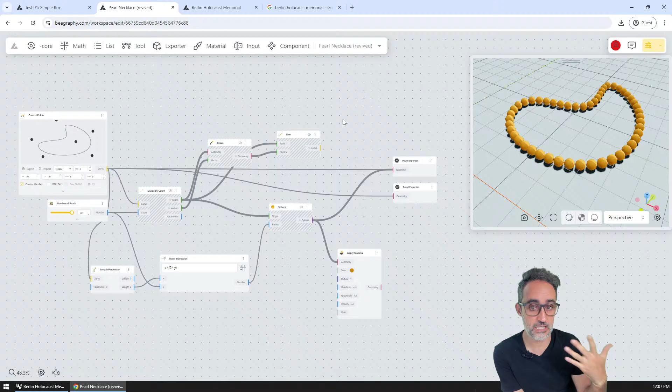So that's a big thumbs up. For most of what we wanted to do, the components were there and the names were obvious, clear, and intuitive. I had a bit of an issue making a conditional flow chart, but that can probably be solved with a few extra components.

And we did get all the way to creating the Berlin Holocaust Memorial and exporting it. Now it's ready for 3D printing, rendering, submitting it to the Beegraphy competition, whatever that looks like for you. So I don't know, I'm giving it a big thumbs up.

Oh, and the fact that all of this is online, browser-based, no downloads, no installs. And the fact that you can connect it to the market and then just place this online for people to use - I think that has tremendous value.